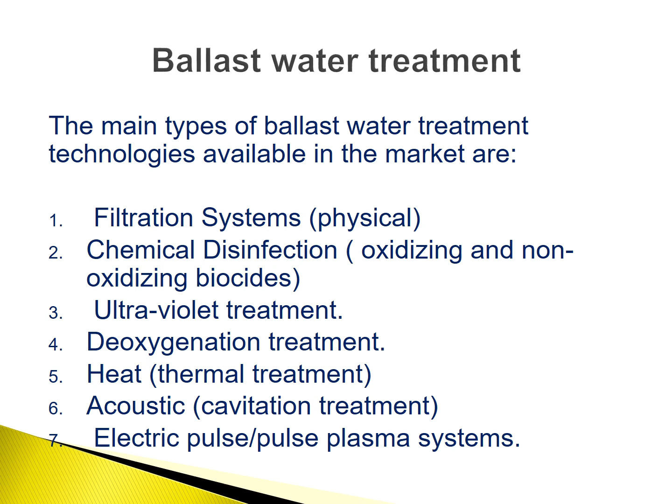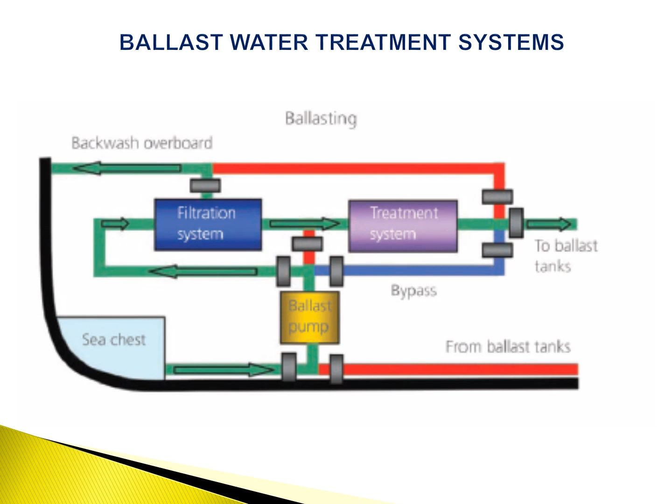In February 2004, the International Maritime Organization (IMO), part of the United Nations, adopted the International Convention for the Control and Management of Ships' Ballast Water and Sediments, which prohibits the transfer of marine organisms in ballast water.

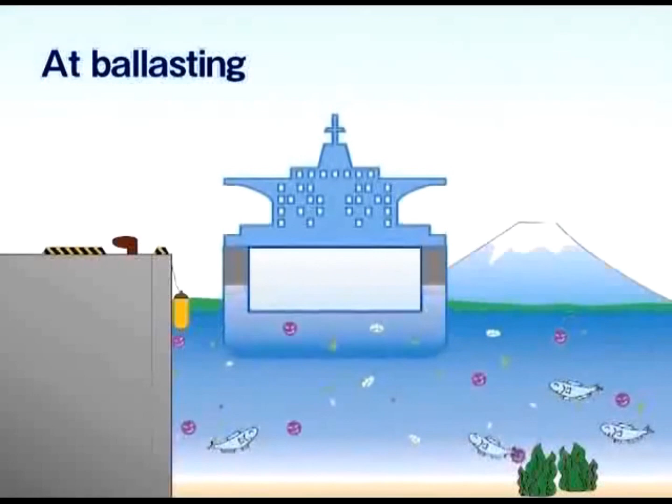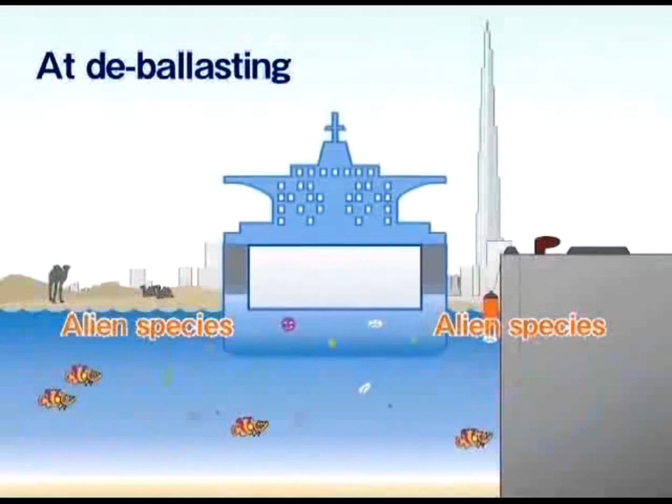Ballast water is seawater uptaken by ships as weight in place of cargo. When a ship unloads its cargo and leaves port empty, it fills its ballast tanks with ballast water. Then, when the ship takes on cargo at a port in another country, it discharges the ballast water. The problem is that marine organisms in the ballast water are discharged into different waters as alien species.

This can cause destruction of the local ecosystem. For this reason, the IMO established the strict D2 standard for ballast water treatment. Under the D2 standard, ships must purify their ballast water to a level that would allow ocean bathing before it can be discharged into the sea.

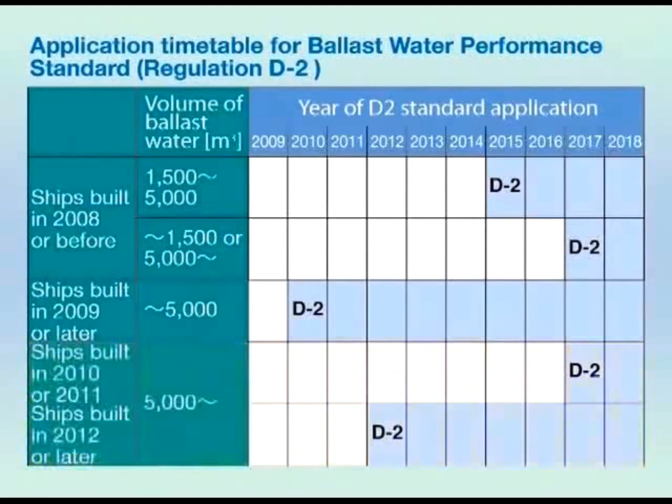The start of regulation is currently awaiting ratification by the IMO. However, this standard will be applied to new ships with a ballast water capacity of less than 5,000 cubic meters constructed after 2010. It will also apply to large-scale ships with ballast water capacities of 5,000 cubic meters or more beginning in 2012. Worldwide, approximately 65,000 ocean-going ships will be subject to this regulation.

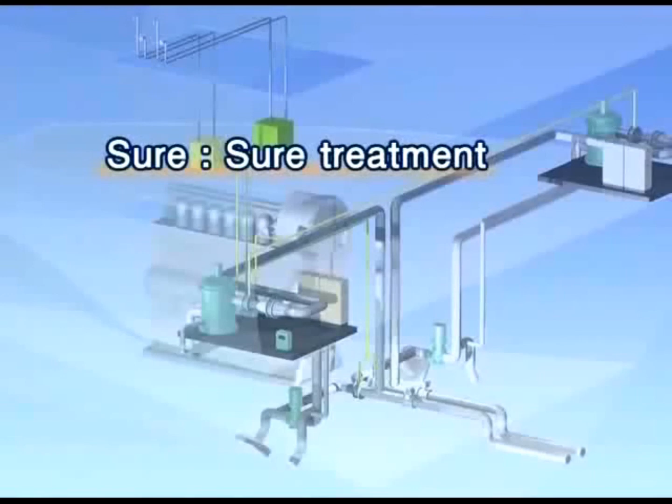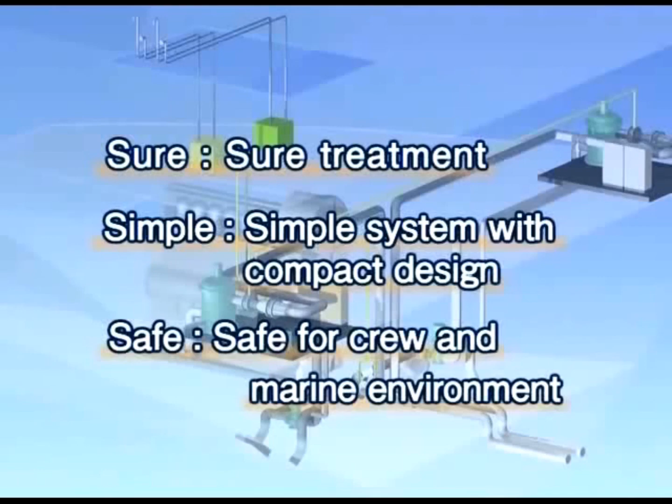JFE Ballast ACE is sure, ensuring completely sure treatment; simple, being a simple compact system; and safe for both the ship's crews and the world's oceans. These are the three basic concepts of JFE Ballast ACE. Now let's see how the system achieves each of these aims.

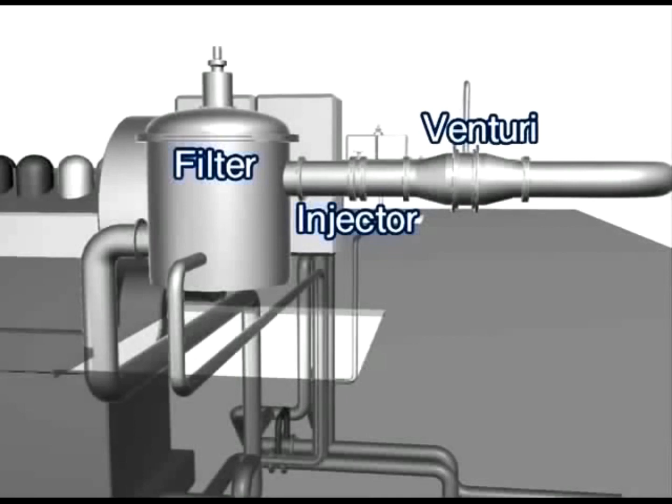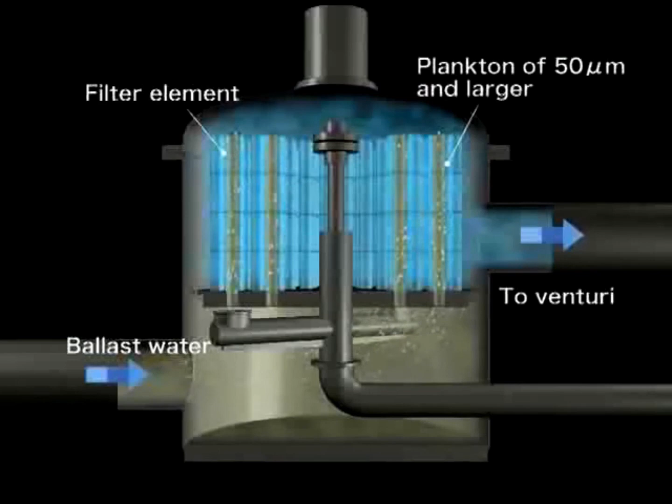First, sure treatment. The system can be broadly divided into the filter, injector, and venturi components. Treatment of ballast water taken on by the ship begins with the filter system. The ballast water enters the filters from the bottom, and plankton with sizes of 50 microns and larger are removed by the filter element.

Filter elements are automatically backwashed in sequence. The removed plankton with sizes of 50 microns and larger are returned to the sea together with the backwash water. During backwashing, the other filters continue treatment.

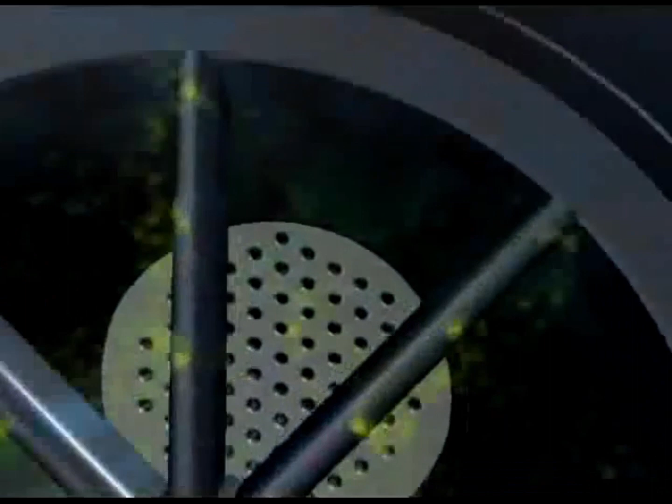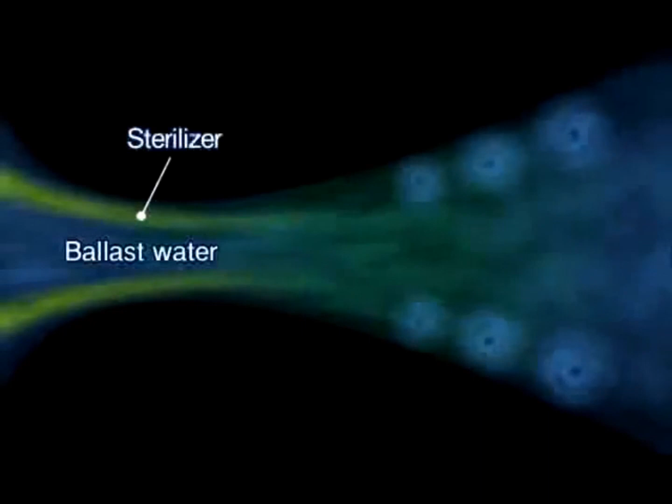Next, the injector injects a disinfectant at a number of points. The venturi system consists of a large number of conical venturi tubes arranged in parallel, ensuring uniform instantaneous mixing of the disinfectant. In addition, bacteria adhering to sand are separated, heightening the disinfection effect.

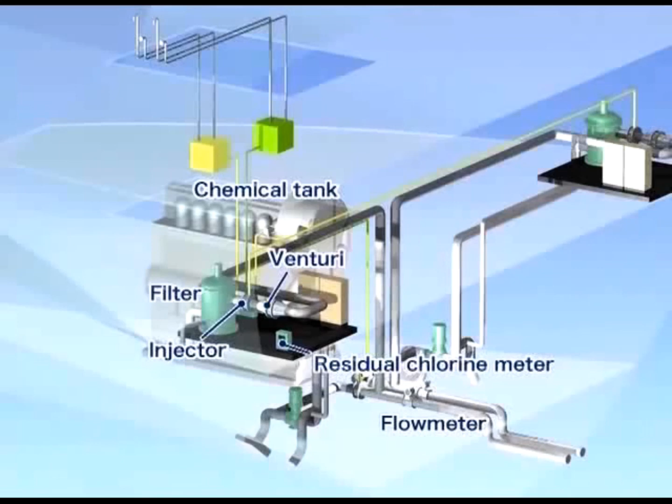Simple: a simple system with a compact design. The JFE Ballast ACE system is extremely compact. The unit can easily be installed in the limited space of a machine room. Because the equipment requires only about 3 kilowatts of power, it is not necessary to increase the ship's generator capacity.

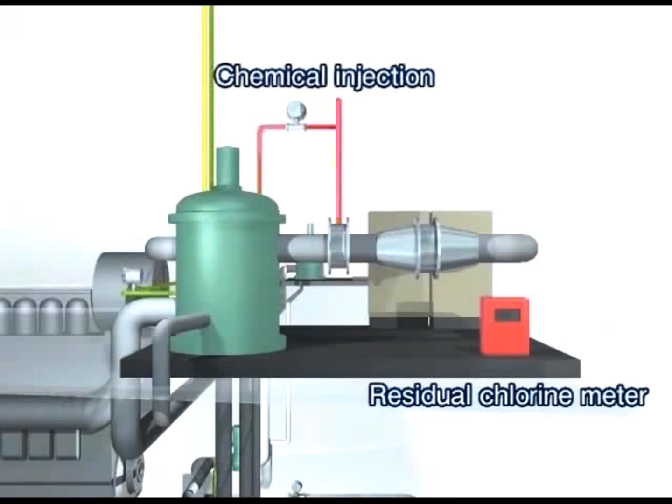Because the chemical injection rate is controlled automatically by the residual chlorine meter, operation is simple and does not place an extra burden on the crew.

Safe: a safe system using common chemicals. Safety is not a problem with JFE Ballast ACE. The disinfectant sodium hypochlorite is a widely used general-purpose chemical with proven safety. The residual chlorine is completely decomposed by a reducing agent and has no effect on the natural environment. Supply of the sodium hypochlorite disinfectant and sodium sulfite reducing agent to ships is possible worldwide.

A wide range of JFE Ballast ACE systems is available for ships of every type and ballast water capacity. This system is suitable for both existing and new ships, and for ships of every size.

Introduction of ballast water treatment systems is an important issue for every ocean-going ship and cannot be avoided. The features of JFE Ballast ACE include sure treatment, easy installation and operation, and complete safety for the crew and the marine environment. And all these advantages can be realized at low cost. JFE is ready to support every business committed to protection of the global environment and a new era in maritime transportation.

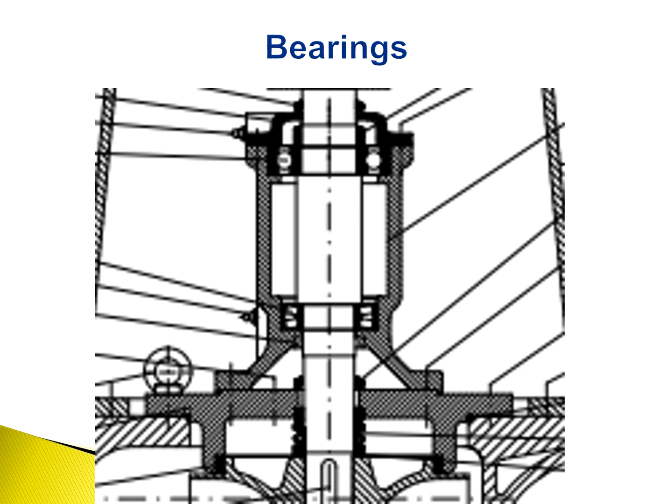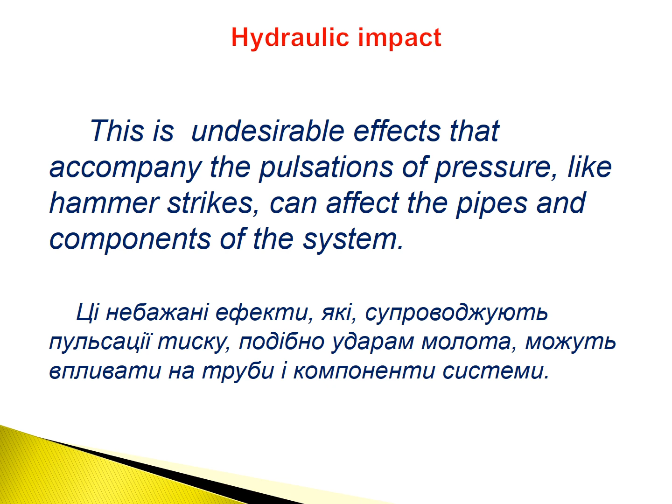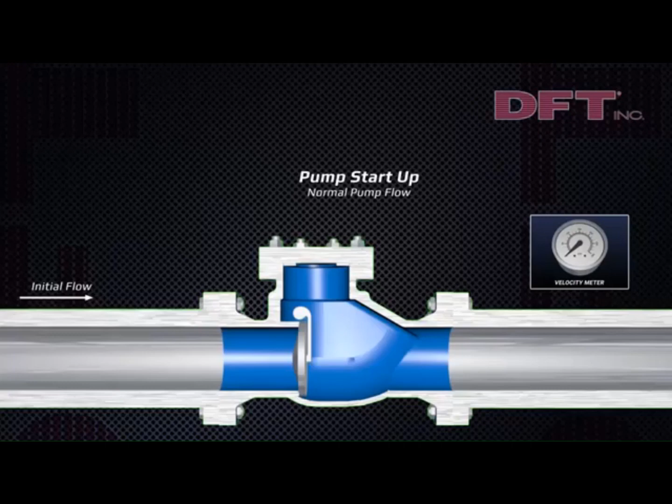Water hammer is a shock wave transmitted through fluid contained in a piping system. It occurs when fluid in motion is suddenly forced to stop moving, and frequently occurs at pump shutdown. We'll be showing the difference between using a swing check valve and a spring-assisted DFT silent check valve.

Here you can see the fluid flow upon pump startup. The motion and slamming of the swing check can cause damage to sealing surfaces, fatigue, and wear to the hinge pins. When the pump shuts down, it is gravity and reverse flow that slams the swing check valve closed, resulting in pressure wave build and water hammer.

Water hammer can also damage pipe hangers, instrumentation, and lead to dangerous work environments.

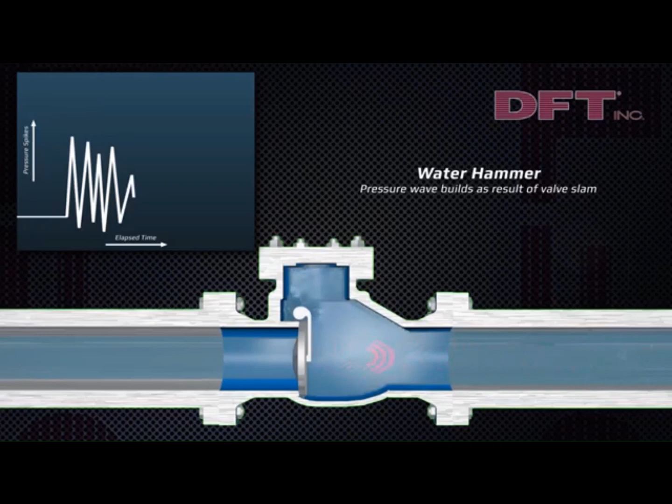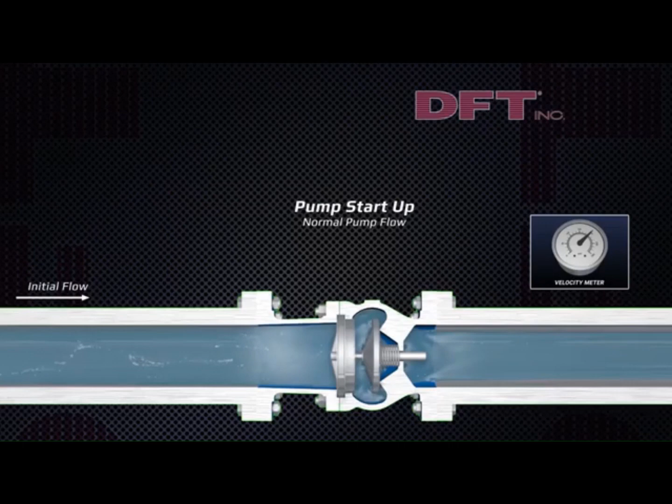Now you see an Excalibur model DFT spring-assisted silent check valve on pump startup. When the pump shuts down, the spring-assisted silent check valve closes ahead of reverse flow before fluid momentum changes direction, thereby significantly reducing water hammer. Pressure spikes are minimal because the disc closes ahead of the reverse flow.